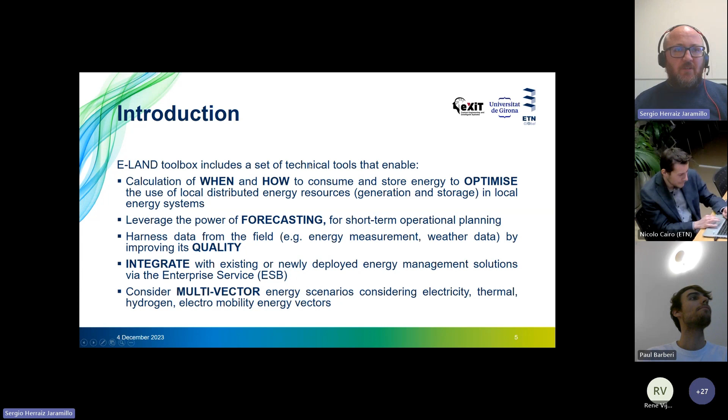The tool is based on the fact that in the local energy system there exists a set of dispatchable assets that can be controlled in order to optimize a set of objectives. These objectives can be peak shaving, maximizing self-consumption, maximizing the percentage of renewable energy that is generated inside the energy system, scheduling these dispatchable assets while taking into account the operational constraints that can exist.

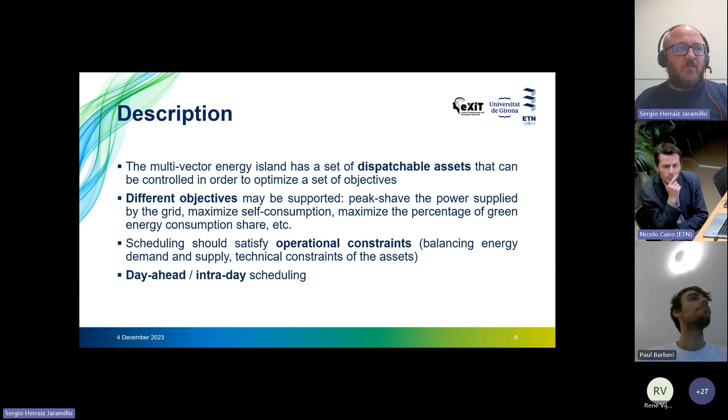And in a scenario that comprises basically the day ahead, or it can be adapted to intraday scheduling, the first tool, the optimal scheduler itself, then provides the plans for the...

...controllable assets in the local energy systems, the EV chargers or the electric energy storage systems, based on the energy that is forecasted to be produced and to be consumed.

And also the energy prices can be included, the day-ahead energy prices for electricity.

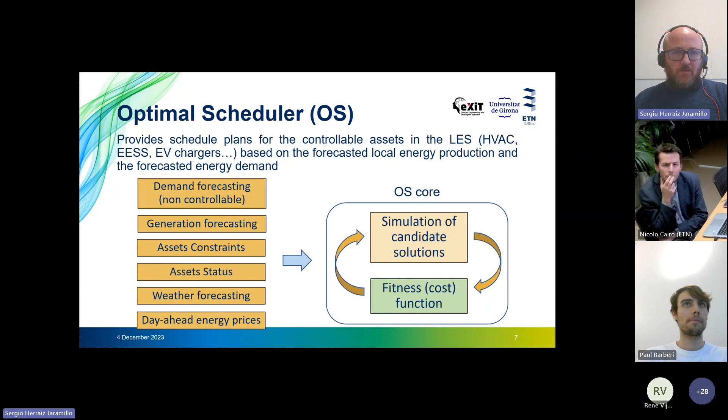The algorithms are based basically, in this case, on genetic algorithms. So the optimal scheduler core performs simulations of the candidate solutions in order to minimize this fitness or cost function, to minimize an objective to be achieved by the optimal scheduler.

For making the presentation a little more clear, I will present the case for one of the three pilots in the project. There were three pilots in the E-LAND project.

One pilot in Spain that I'm going to present is a technology park. Another pilot was in Romania, a university campus, and the third pilot was a harbor, a Norwegian harbor. So, just to be more precise, I'm going to present the case that we developed and implemented for the Spanish pilot site, the Walqa Technology Park.

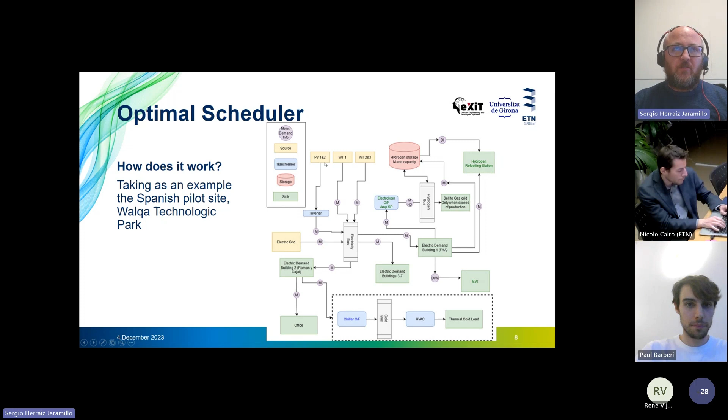In this case, the local energy system of the technology park counts with an electrolyzer that can generate hydrogen. It also counts with a hydrogen refueling station for fuel cell vehicles. It counts with electrical chargers for electric vehicles, and in this case, a part of the thermal system, in particular the cooling system, was also included. In the park there is also photovoltaic generation and wind generation.

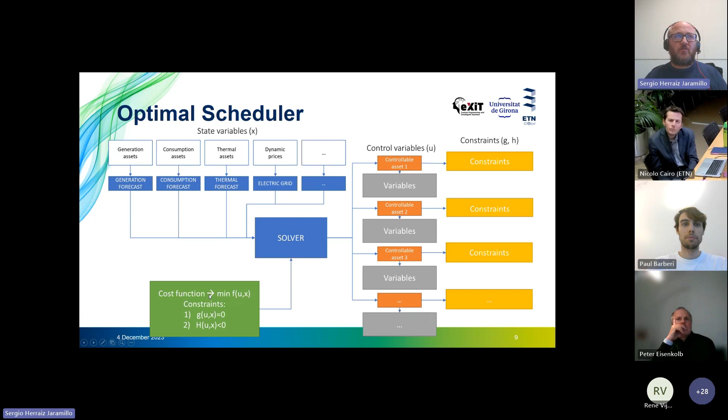This will be the structure of the optimal scheduler: the inputs, the outputs, the variable status control, and the cost function. This is a general overview of the architecture of the optimal scheduler, and this is the particularization for the Spanish pilot site. So we have to forecast the production, both the wind and photovoltaic production, and forecast the consumption in different buildings in order to control, in this case, 4 assets: the electric vehicle chargers, the hydrogen station together with the refueling station, the electrolyzer, and the chiller, one part of the HVAC system.

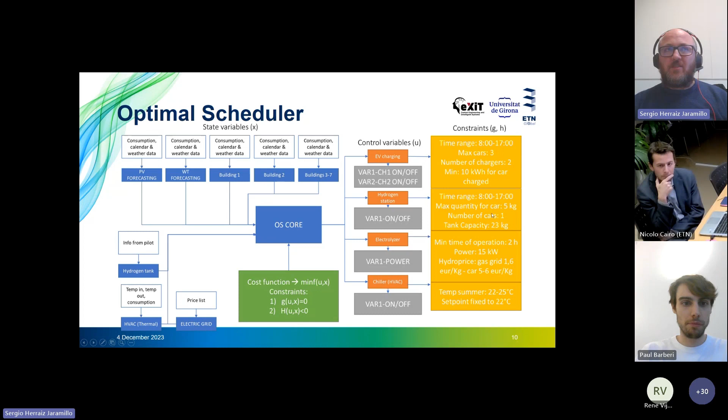As inputs, also information from the pilot such as the status of the hydrogen tank, information from the thermal system, indoor and outdoor temperatures, consumptions, and also the price of the electricity. And finally, on the right of the slide, the constraints for each of the 4 controllable assets. For example, for the electric vehicle charging, the time range in which users can charge their cars, the maximum number of cars that can be charged simultaneously, the number of chargers, the minimum required energy for each car. So the right side of the slide shows the constraints for each asset, whether there is a minimum time of operation, the capacity of the hydrogen tank, or for the chiller the set point temperature, etc.

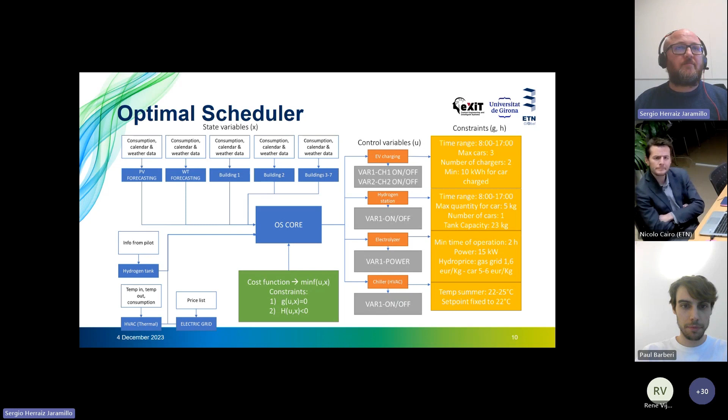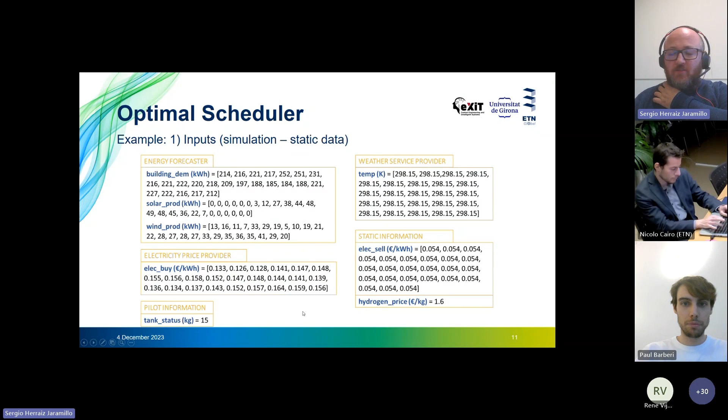As a result of the optimal scheduler, we got the 3 scheduling plans, in this case for the day ahead with a resolution of 1 hour: when to produce hydrogen, how much hydrogen to produce, whether the chiller in the HVAC system is working or not, when to charge the electric vehicles, and, more than when to generate hydrogen, when it can be used.

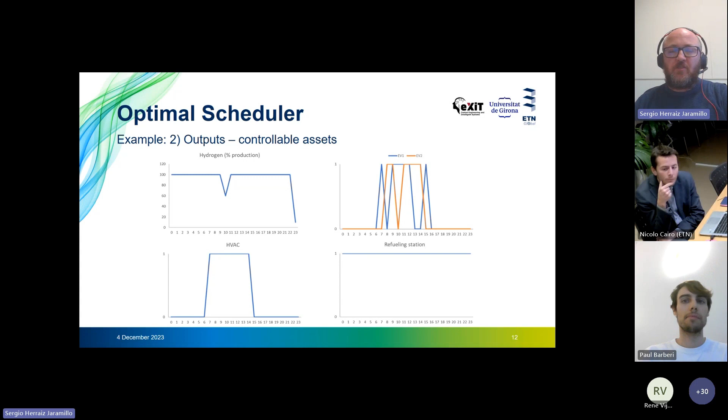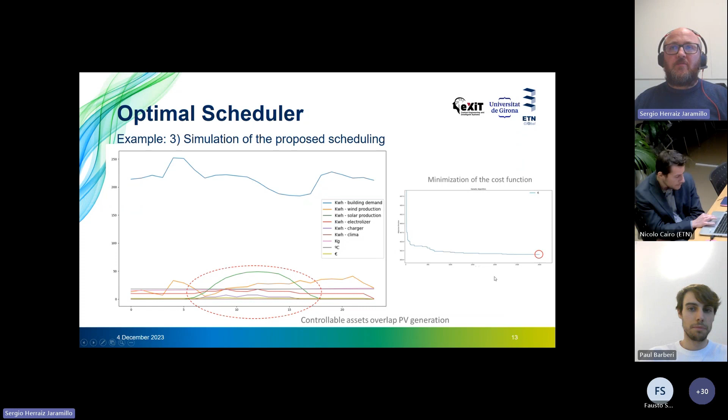This slide shows the simulated behavior of these controllable assets together with the generation assets in the local system. In this minimization of the cost function, the target was to reduce the cost of the electricity needed in the system. So this was the criteria in this example, to reduce not only the amount of electricity from the grid, but also the bill that is going to be paid for this electricity.

Since for the optimal scheduler forecasting is needed, both the consumption and the generation need to be forecasted. A second module was developed whose objective is to create the models to forecast, in this day-ahead horizon with a 1-hour resolution, the demand and production in the energy system. In this slide, you can see the 2 levels. The first level creates the models based on historical data, both energy data and weather data, and also some contextual data, for example, the working days, working hours, etc., to create the models for the controllable assets, non-controllable assets, demand, and generation.

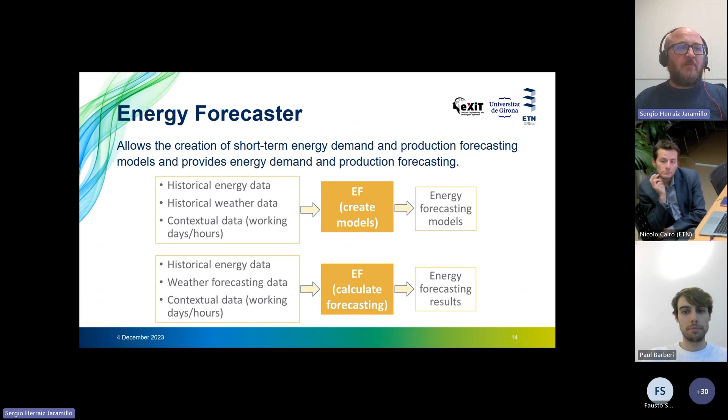And the second level forecasts these values making use of these models, which are data-driven models. So in this exploitation phase, to obtain the results, historical data is also needed, energy data close to the day that is going to be forecasted, of course the weather forecasting data, and also this contextual data based mostly on calendar and timetables.

In this slide, I would like to show the approach for the consumption forecasting based on time series data-driven models, based on historical data that is gathered in the field, making use of different algorithms. In our case, we try to choose the best algorithm that fits with the data that we are working on. So the algorithms can be neural networks or support vector machines, etc.

In order to train this model, in this case, this is just an example of the real consumption and the consumption forecasted. In this case, to choose the best model or to retrain the models over time if needed, indicators such as mean absolute percentage error or correlation coefficient are used.

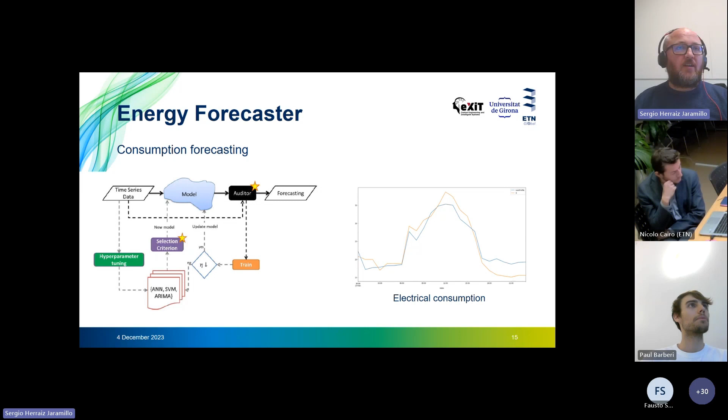For the generation, the models are also based on data, but combine physical expressions. For example, not considering all the specifications from the manufacturer of the PV panels, but maybe physical expressions that relate the irradiance with the production, the efficiency, in order to adjust some parameters in the model using historical data.

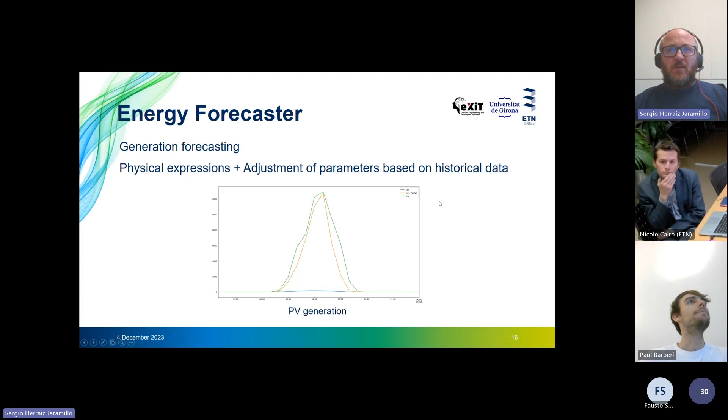In this case, we have the figure of the real PV from one day and the forecasting, and in this case the blue line corresponds to the global irradiance.

The third module I would like to talk about is this data preprocessing application, which takes into account that the data gathered in the field may contain errors or some lack of data, and may also need resampling from the frequency at which the data is gathered to the frequency used by other applications. In this case, to resample to get a granularity of 1 hour.

In this slide, you can see two examples. On the left side, the outlier detection and the value imputation, and on the right side, the energy profiling, using a longer history of data to get a profile that can be used afterwards in the forecasting models.

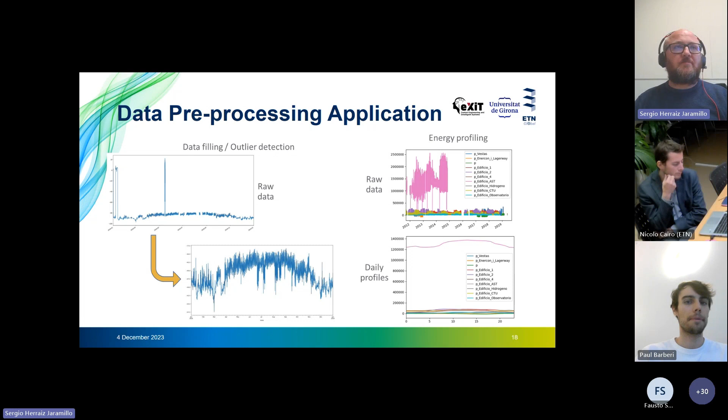So just summarizing, of the tools that we developed in the ILAM project, the main one is the optimal scheduler. The other ones are tools that are needed for the optimal scheduler. As the solution is modular, if you only want the forecasting, you can use this module separately from the OS, or you can use the data preprocessing module just to improve the quality of the data.

This is the development model tools approach. The software is developed as a service with this multi-vector local energy systems approach, in this case electricity, hydrogen, and thermal systems. If you are more interested in reading about this, you can get this publication in the Journal of Cleaner Production that explains the tools in more detail, covering the algorithms or methods used to implement each of the modules, and other information about, for example, the goodness of the forecasted values.

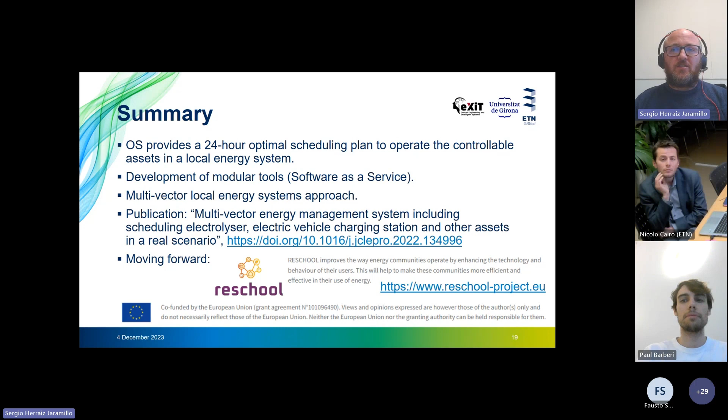Nowadays, the research group continues working on this topic, developing this kind of tools focusing on energy systems. We have just started; this is the first year of the project. Another European project, called Reschool, is oriented to energy communities, but the idea is also developing tools that can help make these energy communities more efficient and active in using the energy they are producing, and making use of assets that can be dispatchable, not only consumption, but also storage assets.

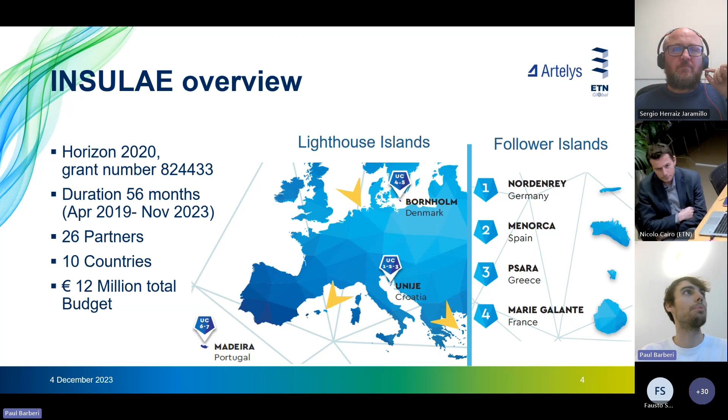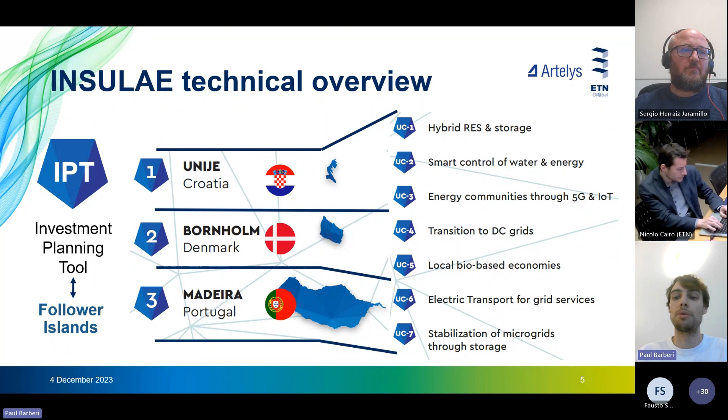We will not talk a lot about the different use cases, but we have a very important range of use cases investigated in the scope of the project, in a very small island, Unije, a large one, Bornholm, and a quite large one, Madeira, with different specificities. I will not really go into the detail of these use cases because it's not the point of today's presentation. I will focus on the investment planning tool that has been designed in order to replicate these different use cases in other islands: the follower islands of the project, but afterwards the point is to be able to replicate this in other islands.

So when I'm talking about the investment planning tool, it's a web-based software that we have developed within the INSULAE project in order to assist island decision makers to design their energy strategies and to monitor the impacts on insular energy systems. In contrast to the previous tools that have been presented, here we are really focusing on long-term investment planning. It's not short-term, it's really to assess, for example, how to reach carbon neutrality in 2050. So it's very long-term.

It's divided into 2 modules. The first one, called the Island Modeling Assistant, is used to represent the current state of the island energy system you want to analyze, in order to know where you are starting from. The second one, which is the most important in terms of objective, is called the scenarization module, where it is possible to represent possible future scenarios of evolution of the island energy system in order to analyze the potential benefits of different use cases, as has been done in the scope of this project, but also different kinds of efficiency measures in order to reach a given policy target.

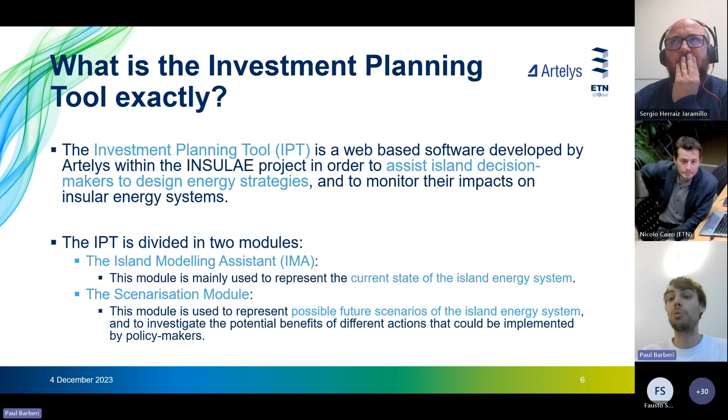So here just a few displays of the tool that I will present after with a short demo. The main view at the center is a map view of the island. Here you have a representation of the Bornholm energy system. And you have different views to manipulate the model and analyze the results. First you have a parameters table view in order to adapt the input of your model. It's also possible to import structured CSV files to adapt the model. You can also use the graphical representation to click on the different assets and look at their parameters.

The IPT handles hourly data. It's very useful, of course, to represent the variability of renewables, and also typical patterns of energy demand. Just for your information, typical simulations are done at the annual level with an hourly resolution. So you have a bit more than 8,000 time steps for your simulation.

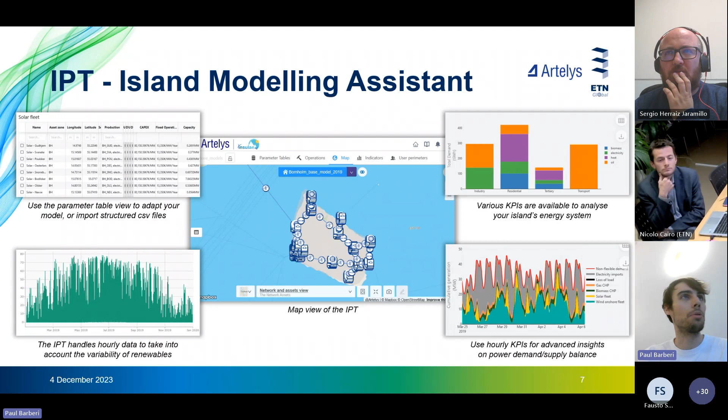And after, you have different KPIs that are used to analyze the different outputs of your energy system, and also some hourly KPIs if you want more insights regarding, for example, here the demand-supply balance of your energy system. Here I'm just focusing on the features. I will explain a bit more about the energy models behind the tool right after. So that was the first part of the tool, the island modeling assistant.

And after, what you want to do with the tool is to be able to project your energy system and see what its evolution can be in the future. For that, the main view is what we call the pathway diagram view, where you can represent different pathways of evolution of your islands. Here it's just two simple baselines with different steps, from 2020 to 2050: a baseline and an alternative.

And after, in order to represent the evolution of your islands, you have what we call the intervention library. That is a collection of different possible actions you can perform on your island to basically make its energy system evolve. You can combine these different interventions with appropriate parameters to represent the evolution of your system. It can be, for example, development of electric vehicles, penetration of renewables, etc. So different kinds of elements.

And after, you need to apply these different actions on your energy system, but also to optimize your system, because among the different actions you can perform, it's possible to say that you want, for example, to optimize your renewable generation. For example, saying that you want a given carbon target, and you can say, okay, I can install up to this amount of renewables, and then you will have an optimization of the investment in, for example, renewables in order to reach your targets and see where you will go.

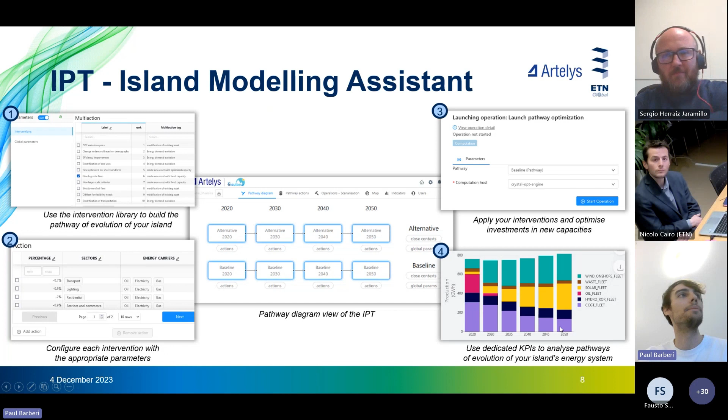And last, of course, different kinds of KPIs. Here, for example, it's just the evolution of the generation mix of a given island from 2020 to 2050. So that was about the software features.

Now, if we talk a bit more about the energy system modeling, the island energy system, you have a detailed representation of the different energy vectors: electricity, heat, gas, oil products, biomass, H2, etc. We have a very detailed representation of the energy demand with a breakdown by sector, subsector, and end use, which is very useful when you are using the scenarization module to target very specific actions. For example, if you want to replace part of your petroleum consumption because you are using electric cars, you need this specific decomposition to be able to perform these steps.

And on the supply side, the user can decide for which energy you want an explicit representation of the supply. Typically it will be for the power side, so the electricity system. Heat generation can be useful if you have a district heating system in your island, but for other kinds, for example, petroleum products, that's not really something we focus on in the supply side, just saying that it will be imported into the island. So no specific modeling is done on this side.

In terms of models, you have an explicit representation of the energy flows within the island, possibly also representing the import-export from the mainland. And in terms of modeling, it's quite similar to probably what has been presented before. It's an hourly optimization of the demand-supply balance in order to minimize the total generation costs, taking into account the different constraints of the different components of your energy system. For example, maximum generation for different kinds of units, etc.

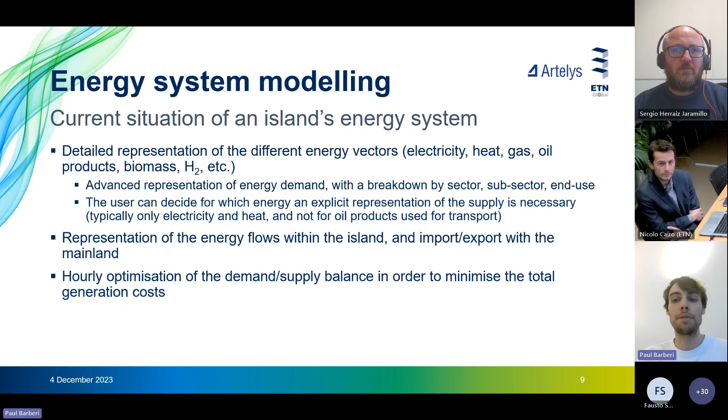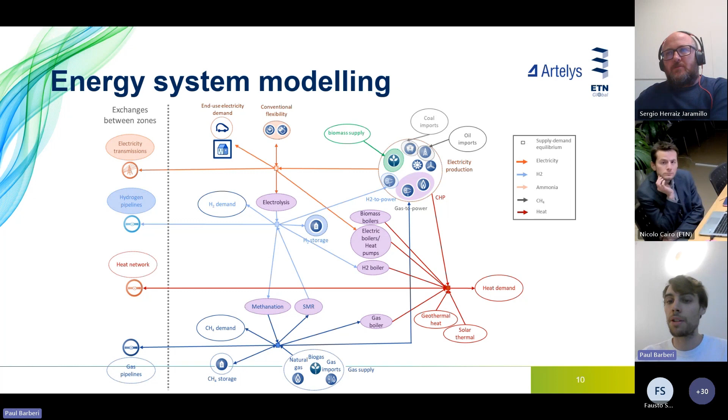Here, just very briefly, I will not spend much time here, on the energy system and the interaction between the different parts of the energy system. It's very coupled between the different energy vectors. Of course you have the power, the electricity side, that can be connected, for example, with the hydrogen layer, with electrolysis, and also with heat networks, with, for example, heat pumps, etc. So just to say that in the end you have a combined representation of the different energy vectors in your simulations, in your models.

Now, when we are talking about the evolution of the energy system, which is represented by the scenarization module, like I said before, we have a library of interventions that are used to create contrasted pathways of evolution of the energy system. So typical evolutions would be first on the demand side. So for example, you can have efficiency measures on different sectors, a switch from ICE cars to electric vehicles. You can also have a switch from one energy vector, for example, for heating, to another one that can be

represented also. It's also possible to represent evolution in the power grid with, for example, new power lines between different zones of your island, but also between the island and the mainland. And of course, investments in new generation plants. And for this part, like I was saying before, the IPT can actually optimize the investments in new capacities over a pathway that are represented by the different steps. So for example, 2020, 2030, etc.

to 2050. And typical parameters for this new investment would be, of course, the investment costs, so CapEx, and also fixed operating costs, the lifetime, and especially for renewables, of course, the maximum potential that can be installed in the island, taking into account the specific limitations of the island. And at the end, you have a joint optimization of the operation at an hourly level and the investment over the pathway. So it's kind of like a balance between operation cost and investment over the pathway.

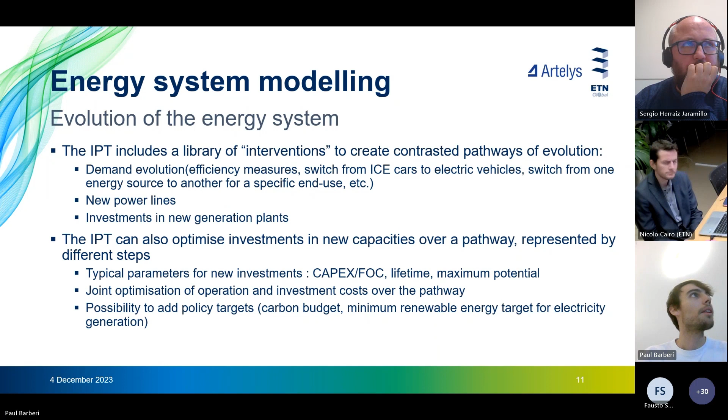And well, I think I will not spend so much time on this one, but just to say that in terms of modeling of the scenarization part or the pathway, the first part you need to represent is your current energy system. So basically where you are starting from. And after, for the different steps, you will have to specify the different elements of evolution of your island energy system. So for some of the different elements you already know what will need to be installed.

So for example, you know that you will phase out your diesel generators in 2030. You can say explicitly that their capacity will be 0 in 2030, but for others, you will want to optimize their investments. So basically, we'll just specify a maximum value, possibly a minimal value, and some CapEx, OpEx, just to be able after to optimize. And after the scenarization, optimization is just a joint optimization of everything.

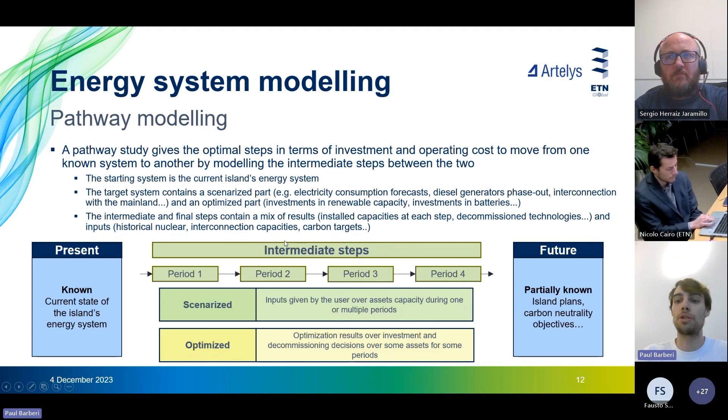I will maybe just now switch to a short demonstration of the IPT. So just give me a second to change my screen. It's going to take a couple of seconds. Yes, should be all right now. Can you just confirm that everything's all right? Yes, I do see the screen. Yeah, that's perfect. Thank you.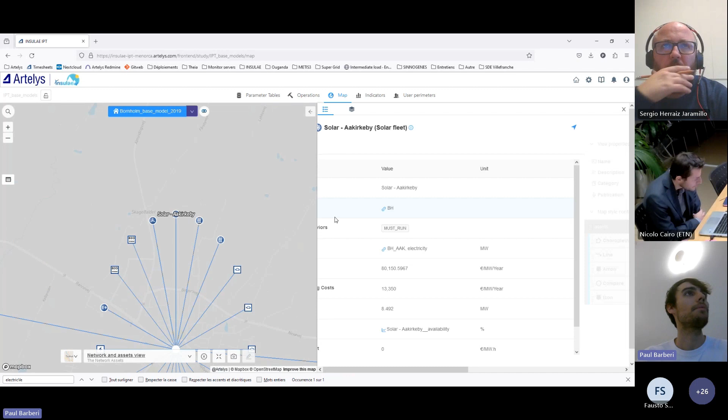So for example, these are the transmission lines between the different parts of the island. Here, if I zoom in a bit more, this asset is representing solar generation. So the typical parameters would be installed capacity, of course, here of 8.4 megawatts. You have what we call the availability, which is basically the generation profile that will be used, between 0 and 100%, representing basically where the solar generation will be.

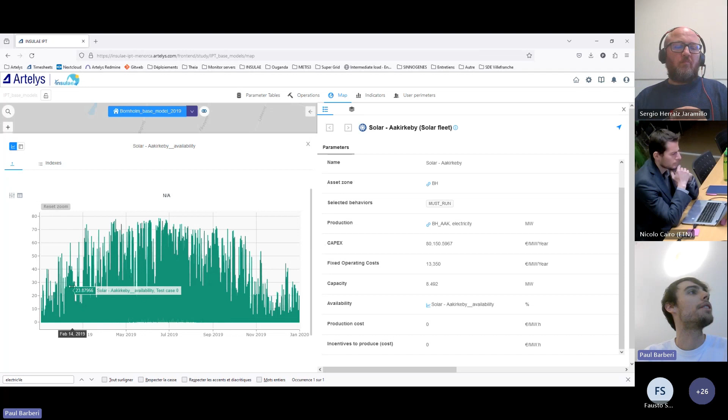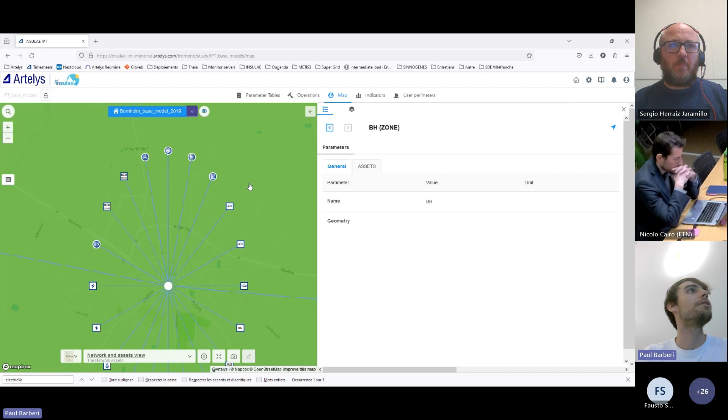And here you have all the data. So if I'm zooming in a bit, you will find the typical daily pattern of solar generation. And I can open also kind of assets, for example, for the power demand would be here.

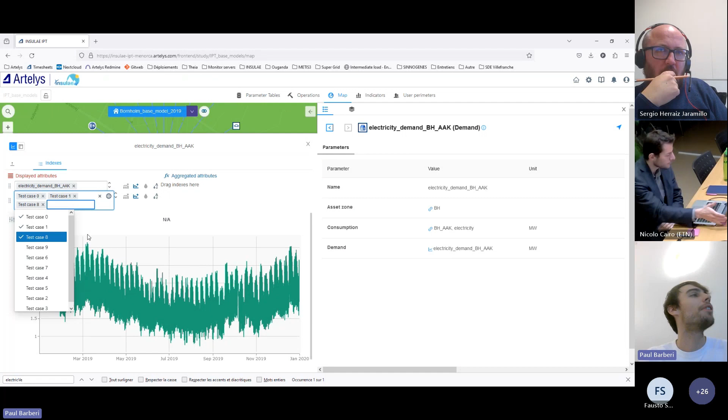Basically the key parameters would be the demand profile, and similar to what I've shown before, here you have a time series for an annual value with different values. I didn't mention before, but in the IPT it's also possible to represent different kinds of climatic years if you want to. Here you have a couple of them, referred as test cases, but they're just different kinds of climatic years.

Just need to use colors here to make it easier to see. So here you will see different kinds of profiles you will get depending on the climatic years that have been used. I think here it was historical years from 2009 to 2019. Here you have the different profiles you will get for your demand depending on the different weather data, so whether it's cold or not, basically, for your power generation.

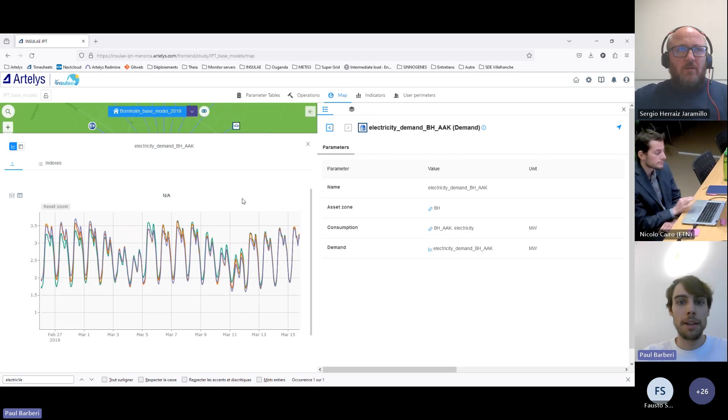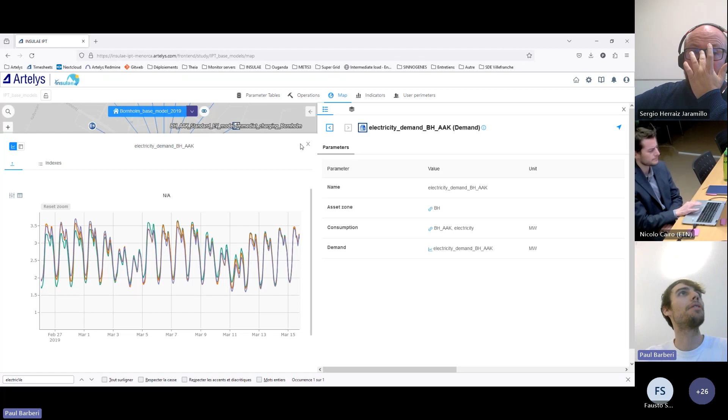And now I can go to another view. So here is the energy system. Of course, you need to perform a simulation to see how your system will behave, and after that it's possible to go to the indicator view to get the results.

Here I can just open first what we call the demand module, where you have this detailed representation of the energy demand. So here, like I was saying before, you have different kinds of energy represented: biomass, electricity, fuel, heat, LPG, and oil, and the different sectors represented here too.

You also have end uses that are represented. So maybe I can just put them instead of the energy. And you can see that you have also a split between the different end uses. This disaggregation is especially used in the scenarization module after, when you want to have specific actions targeted to a specific end use, for example, efficiency for heating, etc.

And that's basically this level, especially for electricity, after this annual volume. That's the one that is used at the end when you have your different simulations done to have your supply-demand match at the end.

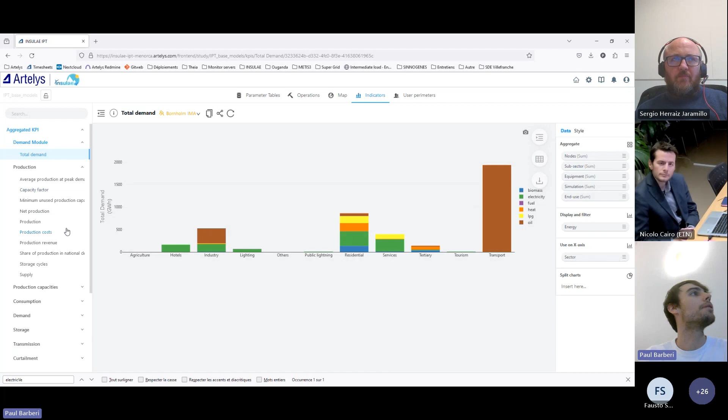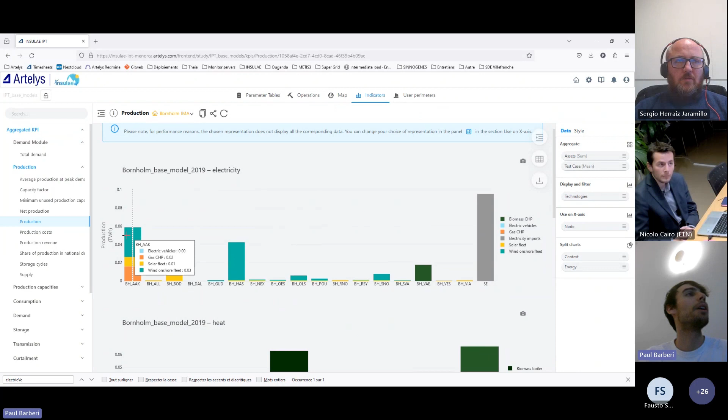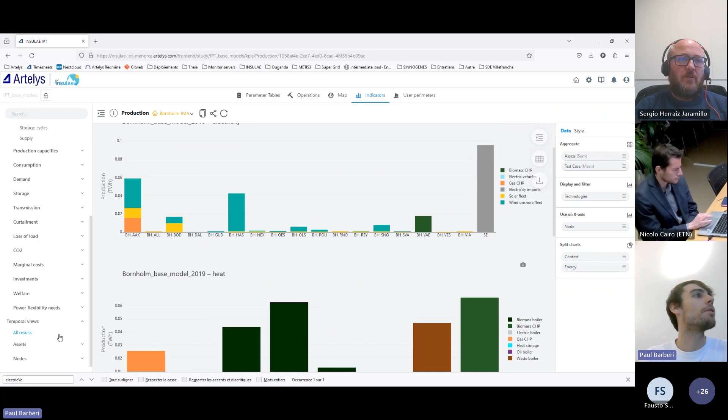And maybe just an example about the temporal views. If you want more details on the exact behavior of your island, you can use detailed temporal views to see how the cumulative generation is done at each hour of the year. So for example, if I'm zooming in at a couple of weeks, you can see that in 2019 there is already quite a large amount of renewable in Bornholm.

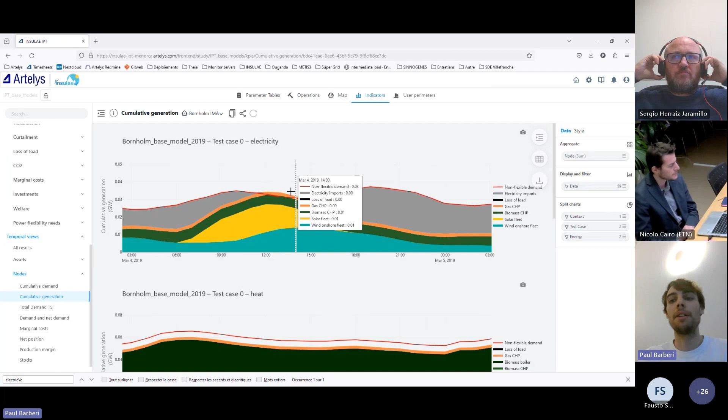But still, you need, in gray here, some imports from the mainland in order to be able to cover the needs, but not at each hour. So for example, here, actually there is an excess of generation for the island that here is not represented, but it's stored in different kinds of storage assets.

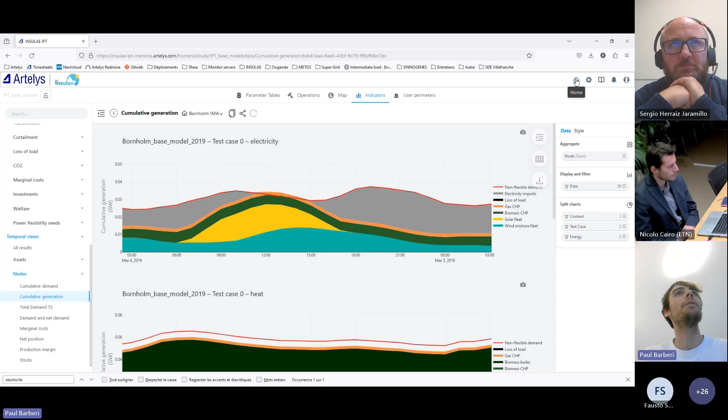So like I was saying before, here I have an example of pathway of evolution. I can just click on the year 2030 to see the different kinds of interventions I have created in order to assess the evolution of my island. So here I can see a list of different actions representing possible kinds of evolution of the island energy system.

So for example, here I have a change in demand based on the demography. It's basically just a small percentage decrease of demand, representing the fact that there is a slight decrease of population in the island of Madeira. You also have some efficiency improvement just below, and a new optimized onshore wind farm.

And for this one, the key parameters would be, of course, the cost. You will have here the maximum capacity. And after, I think I missed it before—yes, here you have the capex of investment for the onshore wind farm. That means that if you install 1 megawatt of this wind farm, you will have to pay this amount. And after, the exact result will be an output of the optimization. A typical other kind of action you will have is, for example, electrification of transport.

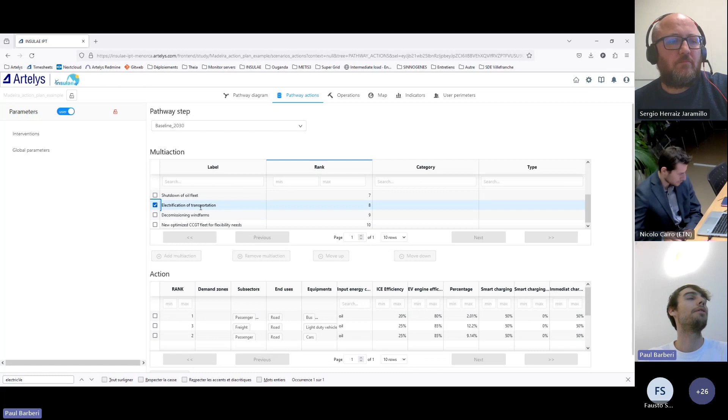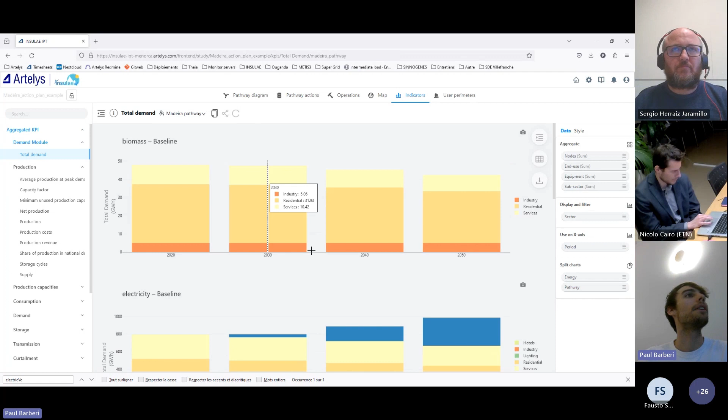I can switch to the indicator view to show you what you will get at the end. I'm going to switch to the Madeira pathway. In this example, you will get a decrease of the oil demand and an increase of the electricity demand, mostly driven by the increase in electricity for the transport sector.

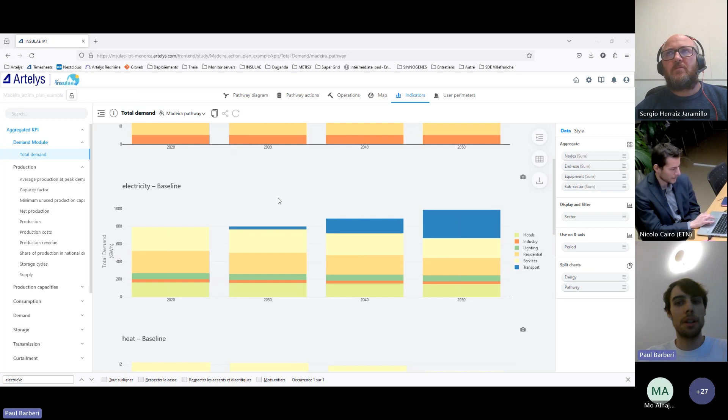Okay, I can switch back for one last slide regarding the commercialization roadmap of the IPT. Just need to change. I would suggest you present the last slide very quickly so we can discuss the Q&A. Yeah, that's just one last slide, it's going to be short.